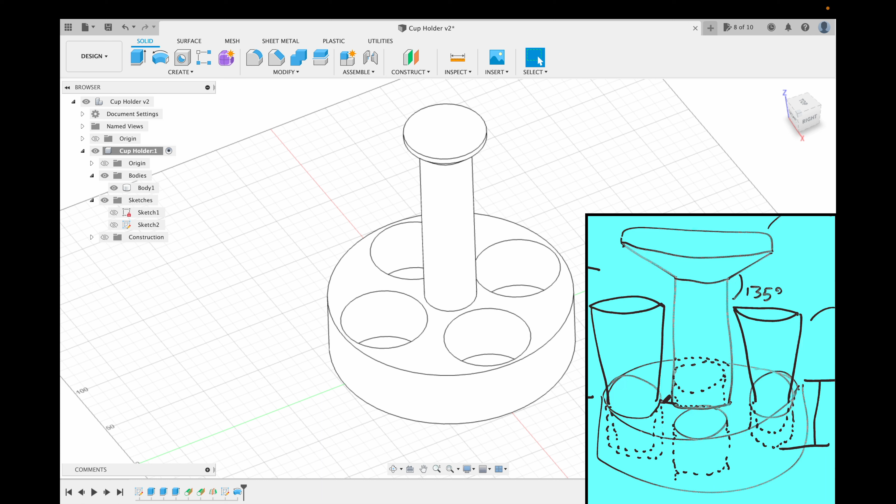So when I think about the stages of CAD, first I'm thinking about basic geometry, and that's what we just finished. You look at this, it kind of matches our picture, but we're really not done. So what I like to think about next is smoothing out the parts, making sure that everything is printable, everything looks like it's going to come out nicely in the print. I want to avoid sharp edges. Looking at this, I think I'm okay with... Am I okay with this?

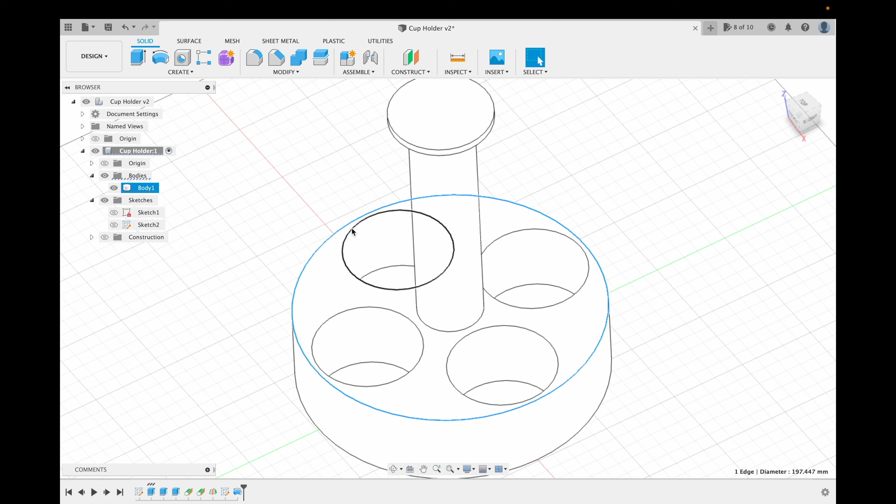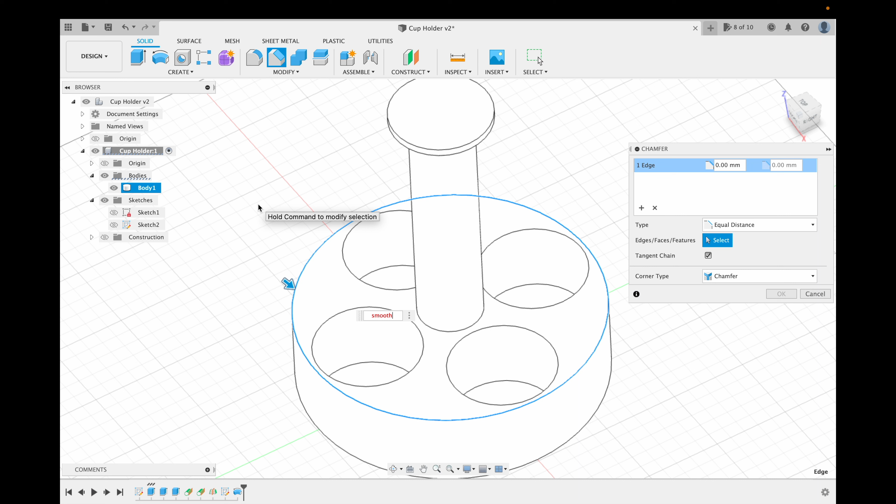I think that I might prefer, actually, for this outer edge right here, to be chamfered. Because this is 90 degrees. As we talked about before, 90-degree angles are kind of weak points, although there's no real stress on this part, so I'm not worried about that. But it does mean if I chamfer this now, let me just show, and I do that value smooth, let's just hit OK. I don't even have to hit OK. You can see from the preview. Let's zoom in.

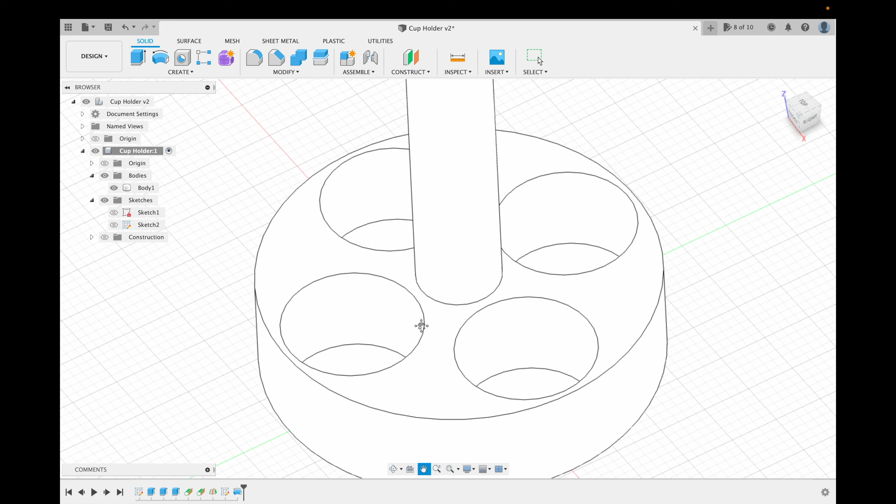I now have a very thin wall right here, and that's because I didn't prepare for the chamfer in the initial measurements. So let's hit cancel, and let's see if we can fix this without breaking everything. So I'm going to go back to our very first sketch. And all I'm going to do, I think, is I'm going to add 2 smooths to this outer circle. So instead of 2 times smooth, it'll be 4 times smooth. And that's that. If we look at this now, if I just draw a little test line from here to here, now we're at 5, which is 3 wall width plus 2 smooth.

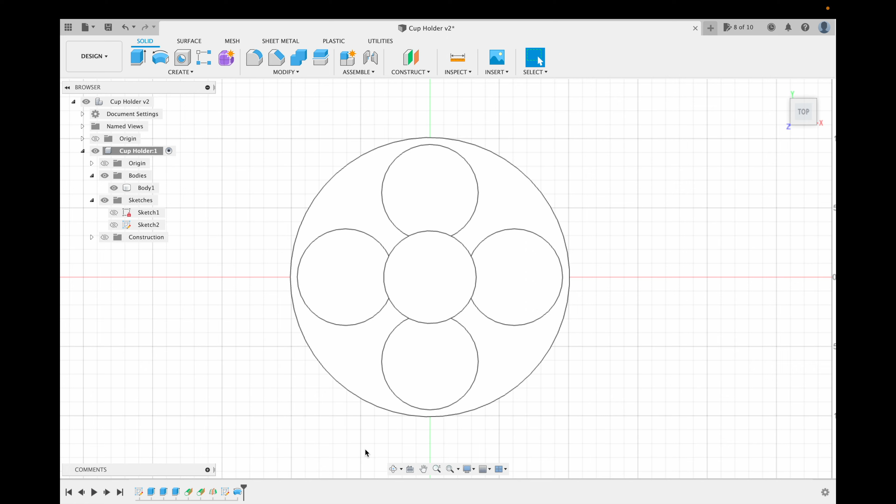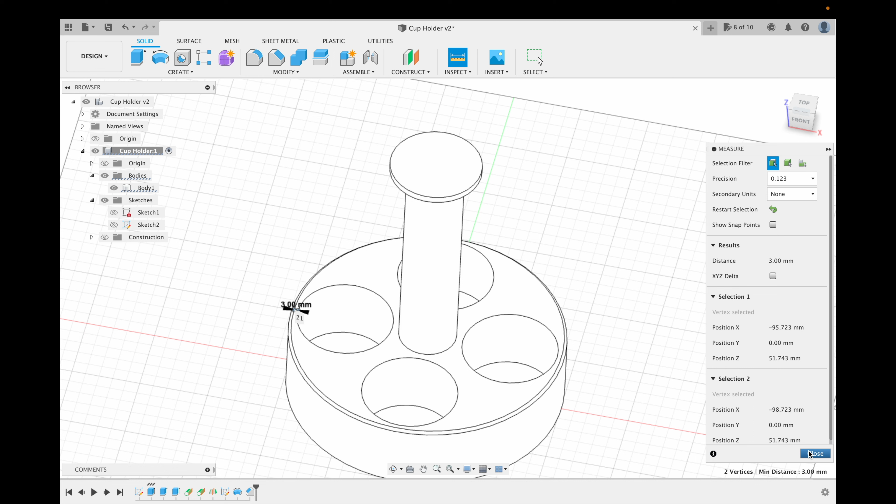So let's finish that sketch. And let's look at this. If we do measurement, maybe we can get it to show us, yeah, that is 5 millimeters exactly. So now, if I go and I do a chamfer out here, and I do smooth, I can now measure from this point to here, and we get our wall width again. So I still have my full wall width intact, and I have a little chamfer. And that's just so that if I'm trying to hold this with my hand, I'm not holding kind of this sharp 90-degree edge.

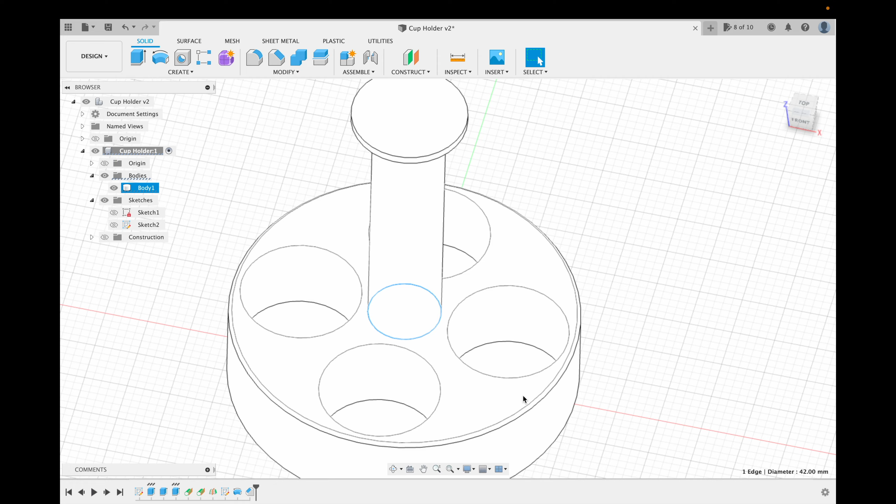The other thing we had talked about before is this right here is a weak point. That's true. We can either fillet it or we can chamfer it. In fact, it's the same situation with this edge. What was chamfer, but let's look at this as if it were a fillet. I can go back to shaded, and let me undo that and swap it out for a fillet. Okay. I think that'll work too. I don't think that there are going to be any issues printing that.

I do think that since I set the value of smooth to 2, we'd probably want maybe a relatively small layer height. So just thinking ahead to the print phase. But I can also increase this smoothing by changing the smooth value to 3. We'll just do a little bit of undo redo, and you can actually see how this changed everything. We've increased the separation because I'm going to be adding smoothing, and I want to preserve that wall width, which I'm clearly doing. And now I've added to the smoothness.

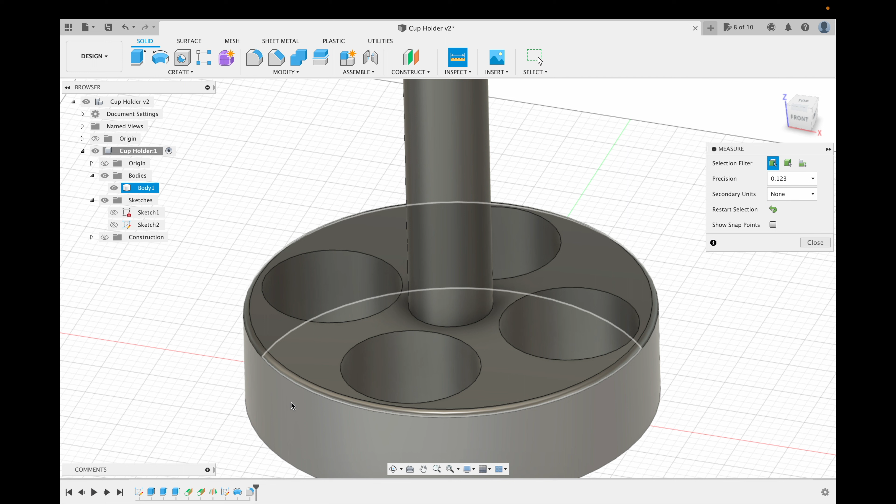But I do want to make sure that that outer diameter is still acceptable, and we're back to 205. That's really about the limit. I'm okay with that, though. Additional smoothness is an acceptable trade-off for that to me. Now, I could also look at smoothing these off. I think that actually is not a bad idea.

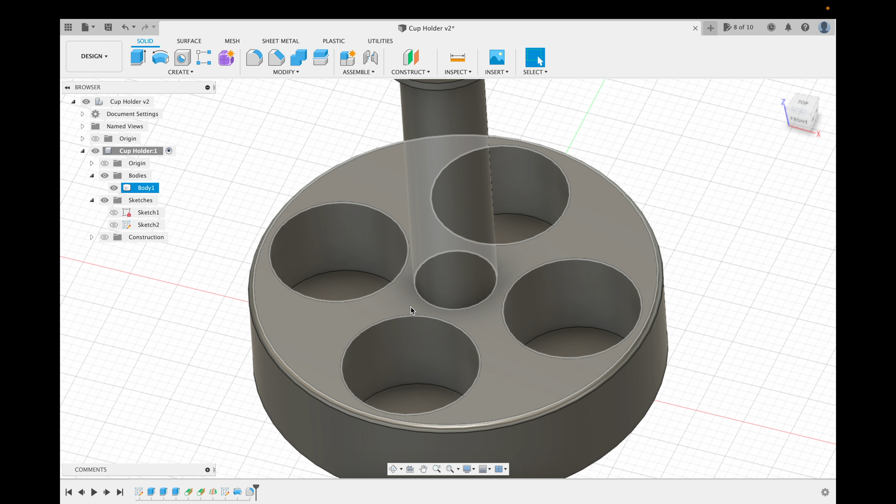Now, would I be able to fit everything if I also added a smoothing there? That would add, I would have to account for it here on the left and the right, and again here on the left and the right, so I'd actually be up to a little bit too much. I can already tell you. If hypothetically I were to do that, I would be at 8 times smooth. And now we're at 217 millimeters outer diameter. That's too much.

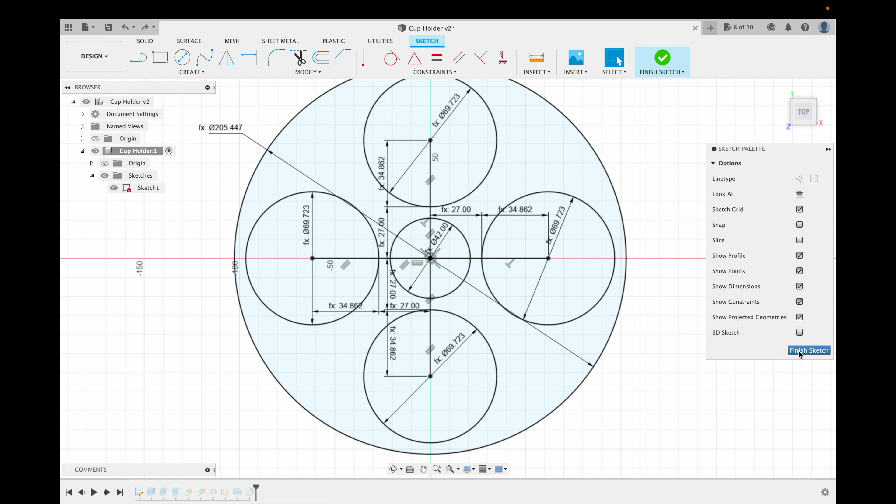So what we could do is we could bring smooth back down to 2. Or, honestly, we could change the diameter of the handle base. 42 millimeters, that's a little bit less than 2 inches. Does it need to be that wide? Could it be 1 inch? I feel like that might be too narrow. But maybe a little bit less wouldn't be the worst thing. If I bring this down to 38 millimeters, let's see what that looks like.

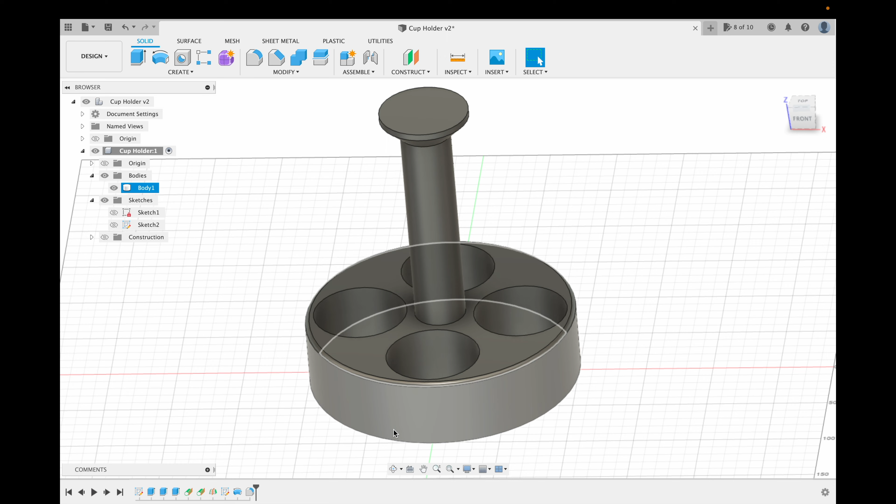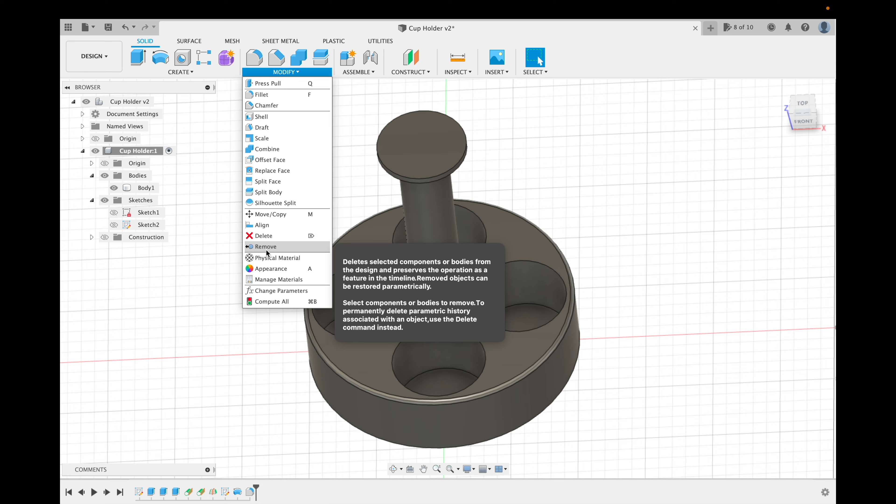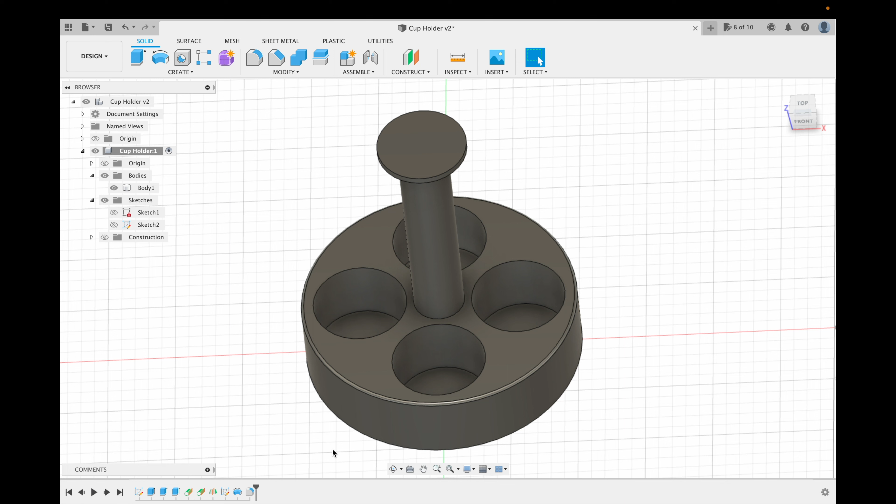Okay, we just narrowed things out a little bit more. You can also see the effect on the top of the handle. And if I look at my outer diameter now, 201, so I still don't have quite that much leeway, but if I reduce the value of smooth down to 2, and now I go back to my original sketch, and now if I do 8 times smooth, what do I get to? 205. We've kind of gotten back to where we started with. I do think that this 2 millimeter smoothing should be sufficient just to make sure that things aren't sharp.

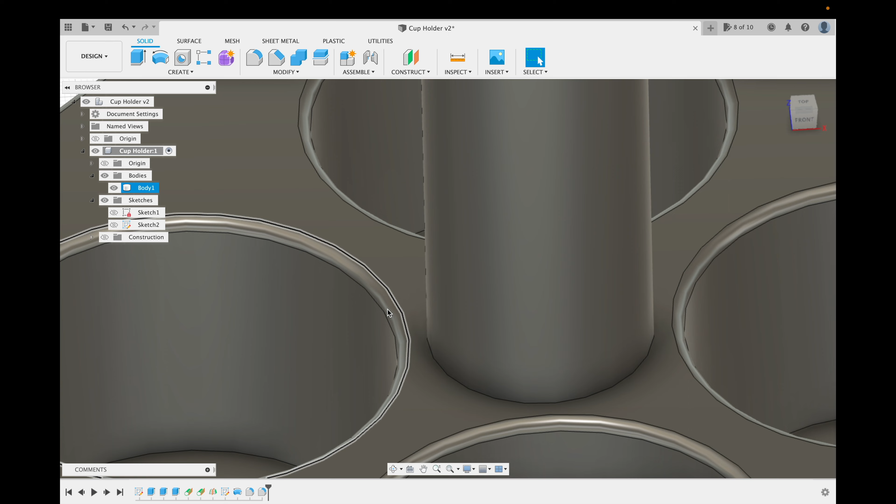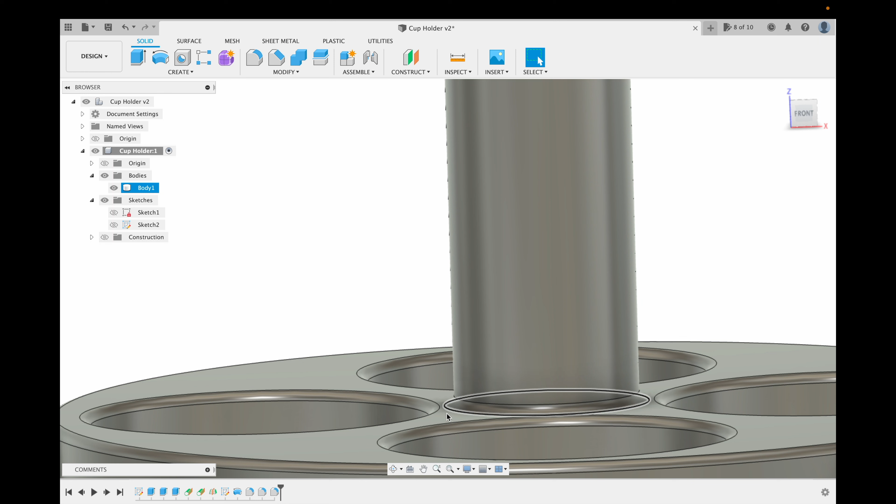Now that we've done that, we can add some fillets on the cup holders in the value of smooth. And I'm now wondering, did I miscompute? Because the distance from here to here is currently 3 millimeters. I think we're actually okay. So let me add a fillet here at the base, which is equal to smooth. Now, if you look at this, I'm not actually violating any minimum wall thickness concerns because this is kind of a downward smoothing action, whereas this is more of building up, or kind of building out. And we're adding that little bit of additional strength there. And actually, because of that, I think that it's totally fine.

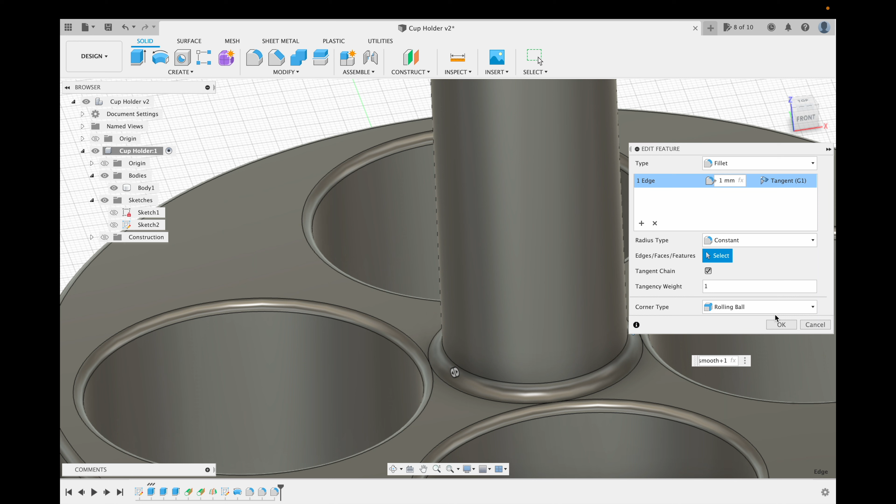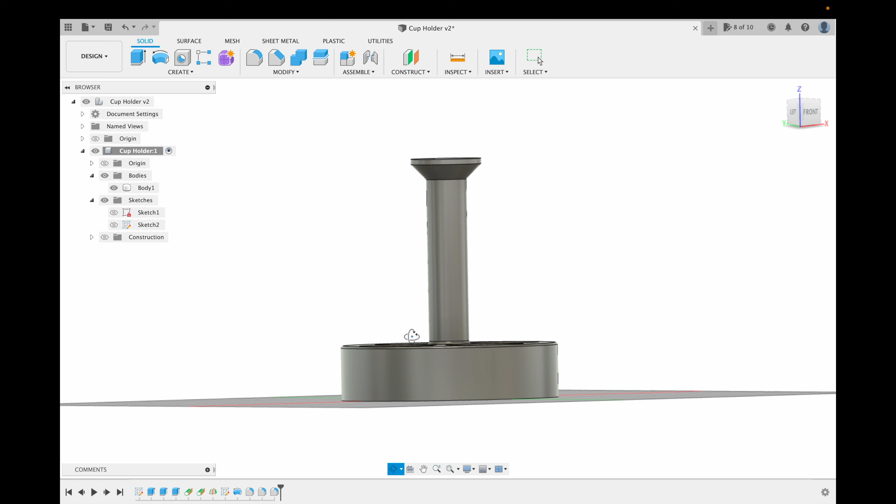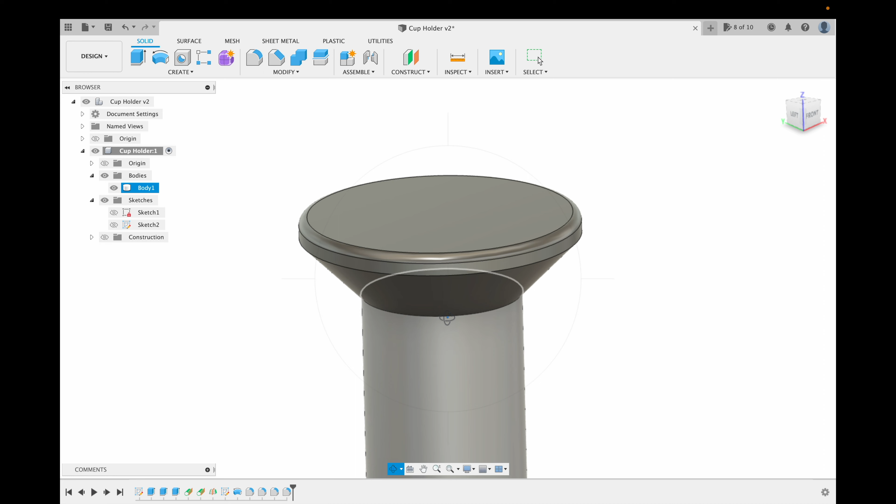Minimum distance is 1. I can actually increase this specific value. I'm going to kind of cheat here and add smooth plus 1. And I think this will print just fine. And we will see this verified in the slicing stage. And like I said before, I think that we're okay at the top. One thing that would be nice is if the handle at the top was smoothed out. Let's see what that looks like. That can be a fillet too. I use the value of smooth up there. How does that look? I think that looks better. And again, we're avoiding those 90-degree angles.

So, I actually just remembered, I forgot one very critical thing. Every time that I'm working with a functional print, I'm going to be inclined to add some tolerance to it. So if I want a part that, let's say, is 30 millimeters, I want to fit it into a holder. I'm not going to make the holder 30 millimeters. I'm going to add a little bit of leeway to that. So if I go to parameters, this doesn't need to be a lot. You can, in practice, really go as low as maybe 0.2 millimeters. That's a typical value for parts that fit into each other.

But for large parts that fit into holders like this, I like to go for a little bit more, like at least a millimeter, maybe two. And actually, if you think about it, in this case, it's not a huge deal because the worst case is the holder is too tight and the cup will still fit into the holder. It just won't touch the bottom. That'll add more stress to the corners of the holder, which is not what I designed for. So I intend to avoid that, but it's actually not fatal. So I'm going to add a parameter and I'm going to call it tolerance. And I'm going to start with just 1 millimeter.

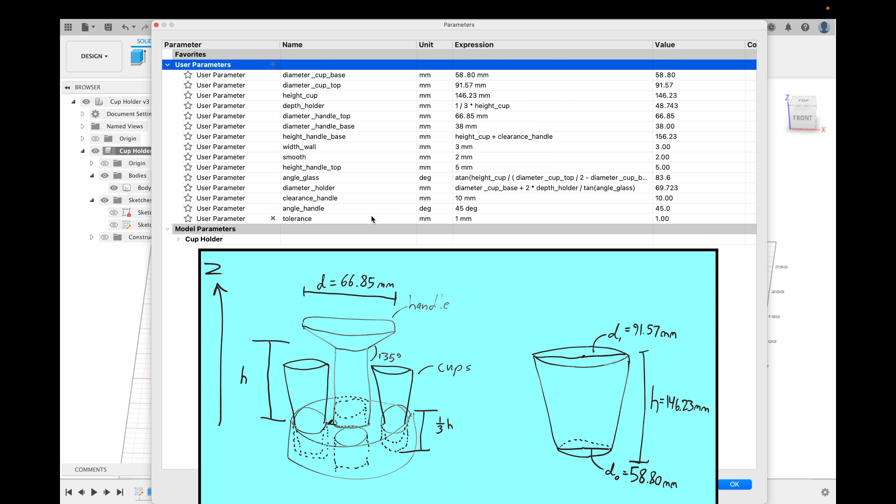And the way I'm going to add that is I'm imagining 1 extra millimeter on every side. So if you have a cylindrical holder, that means on the left I want 1 millimeter, on the right I want 1 millimeter, which means if I've got diameters all over the place, I need to add 2 to that diameter. And so I have this handy value over here, diameter of the holder. And it was computed, and I'm going to add 2 times tolerance. Okay.

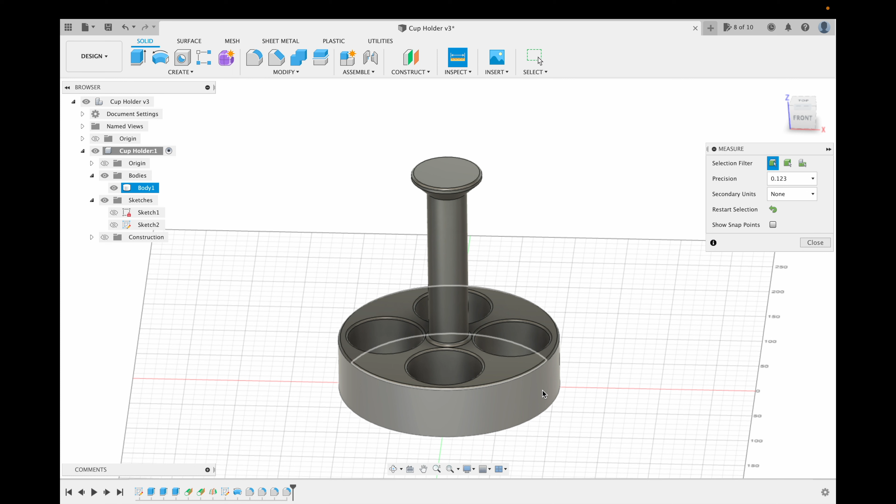Let's do a little bit of undo, redo, and you can see that increased the size of the part. Now I am worried about the overall size. Let's measure it. 209.447. That's not great. I really don't want it to be that close to the edge of the print bed. I'd rather have a little bit of breathing room.

So I'm going to actually bring down the diameter of the base again down to 36. We're just going to see how this goes. And that saved us and brought us down to 207. So I'm going to save it now.

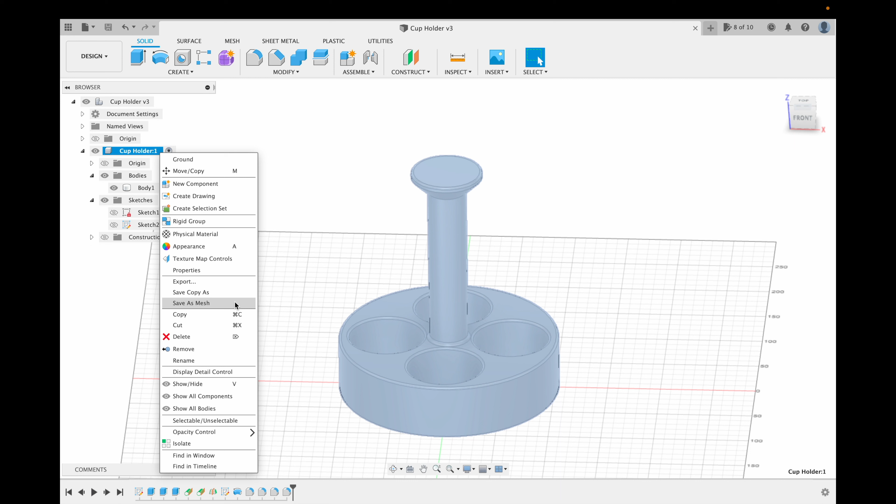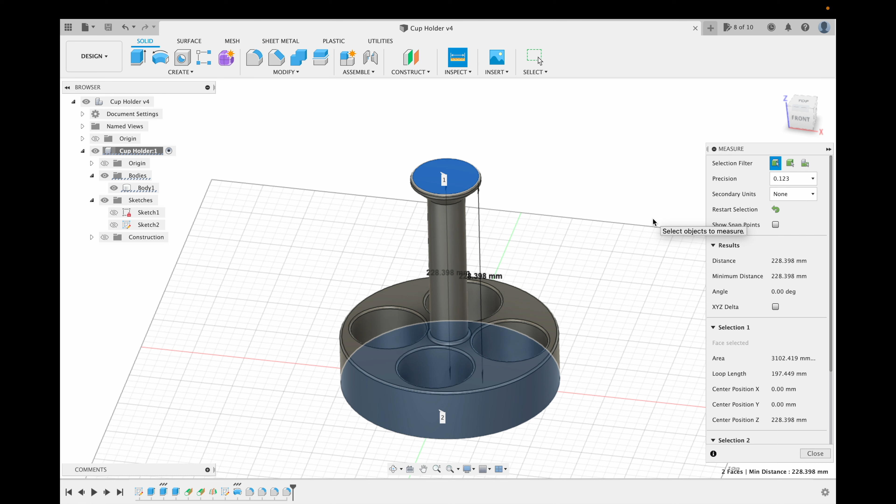And one other critical thing that I forgot. Let's measure the height of this part. Top to bottom. Okay, so that is 228 millimeters. That's too high. Because if you remember, and this will be interesting, our upper limit for the print is actually 210. So we need to bring this down by at least 18, actually at least 19 millimeters. And again, I don't want it to be that close to the upper limit.

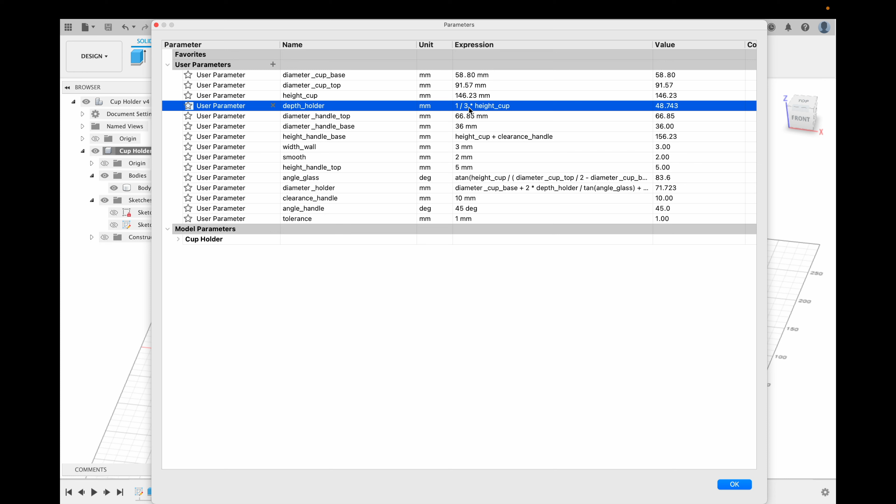The way that we change this is by changing the depth of the holder. I initially went for 1/3 of the height of the cup. And what is that? So 1/3 of the height of the cup is about 50, and I need to shave off 19. If I just quarter this, I'm gonna get about, what is a quarter of that? That's about 37.5. Not quite enough, but if I cut it in 5, so what have we gotten actually?

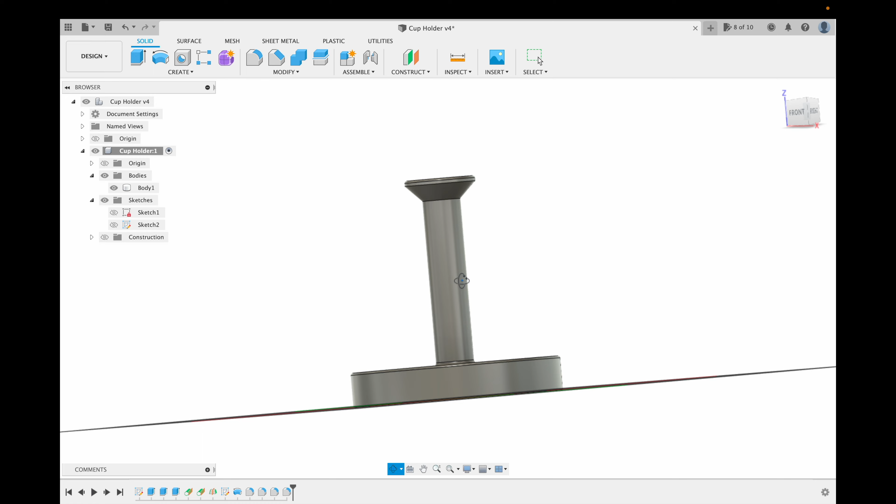Let's just measure it. Top to bottom, 208. Well, that is enough. That is enough. I'm a little bit less convinced that this is going to be high enough. So what I'm imagining now is let's revise. Instead of doing this, I'm not too comfortable with this. Instead of doing this approach, let's look at why I wanted some of the parameters that I initially did.

This height, I imagined this to be equal to h. And I wanted that because I imagined loading in the cups basically strictly from right to left, if you imagine that, like this. Well, that's not really how it has to go. The top of the handle turned out to be a lot shorter than I initially imagined. I think that the cups are going to fit just fine if they have to be wedged a little bit.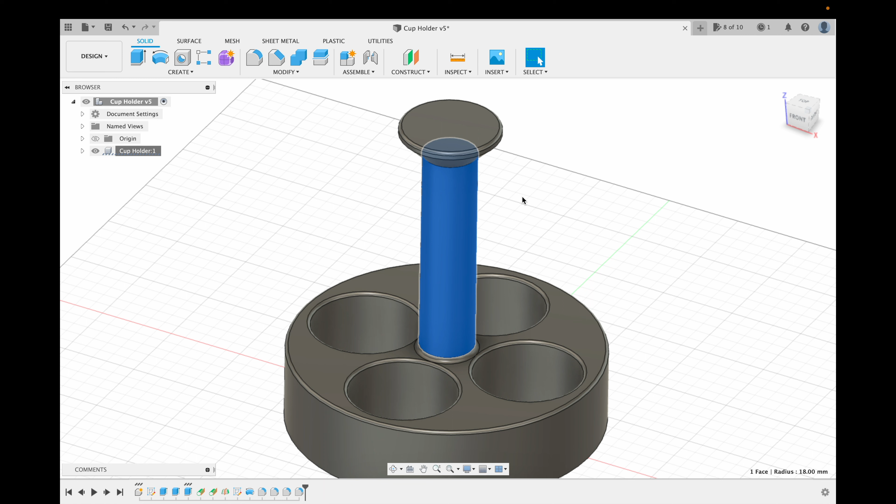In fact, I think that when I added that clearance, so here's the clearance. We're going to take this down from 10 to 0. Let's see what that does. A little bit of undo redo, and we can see how it brings it down. And that means that what's remaining of this handle is just H, height of the cup. So it should fit exactly into this cup holder.

So let's take a look at our dimensions again. So the outer diameter, 207, which is pretty high up there, kind of pushing it, is printable though. And how about the overall height? So from top to bottom, 218. So that's not printable. We have to bring it down further, at least 8 millimeters. So let's see what we can do.

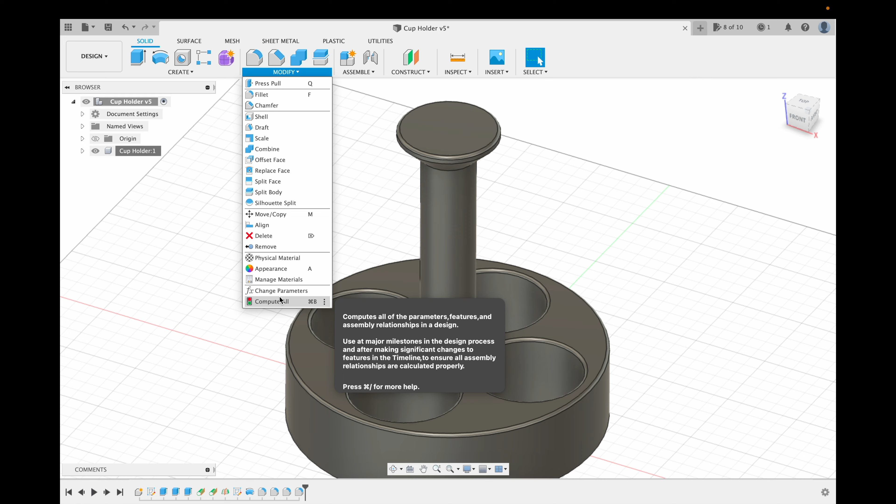Now let's think about the parameters that we have again. So one thing I'm thinking is, we have this depth of the holder. Now in the sketching and concept phase, I kind of intuited that a third of the height of the cup might be a good value to retain the cup. But that was just a guess. And I'm thinking that especially because we're designing this so precisely, we can actually dial this down a little bit.

And this should actually help us reduce both the height, because we're reducing the depth of the holders, and it's also going to help reduce the diameter, which might let us tweak some other things. So let's bring this down from 1/3 to 1/4 and see what it looks like. Let me do some undos so you can see. So it's brought down both the height and the diameter handily.

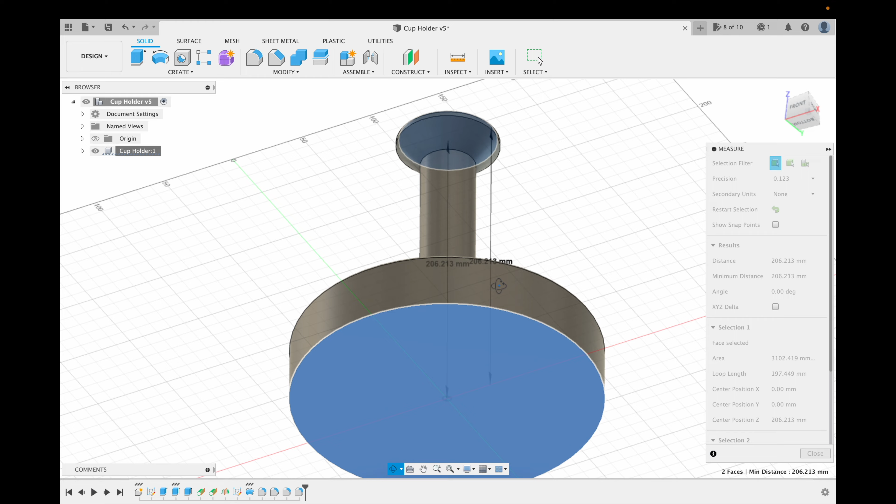Let's see exactly where. So the diameter is now 201.985. That's good. That's some more breathing room. And the overall height of the part, 206. That is printable. Perfect. So now, like I mentioned, we reduced the diameter by doing this. And I'm now thinking, how about that smooth parameter?

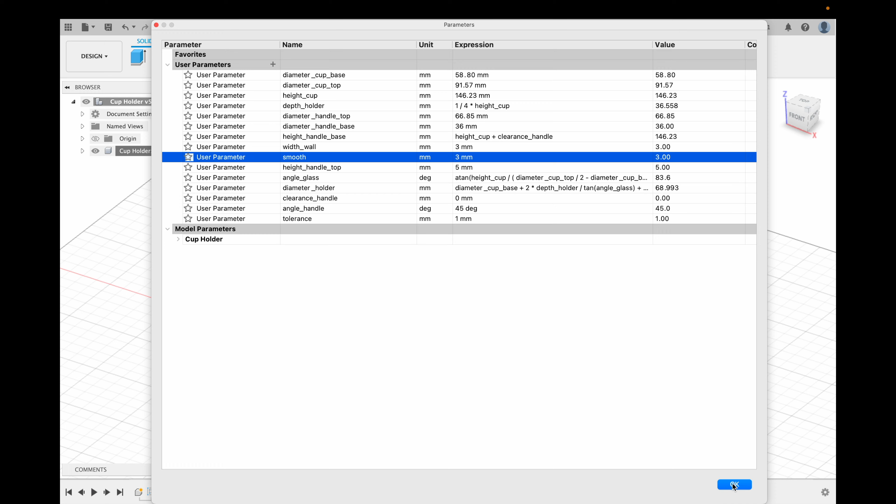We had reduced this from 3 to 2 earlier in an effort to save diameter because we were kind of at the limit. What happens if I increase this to 3 again? You can see that all those fillets, all that rounding off gets a little bit more intense. And it looks like we have maybe some funny business going on at the base of the handle. There are these new kind of sections appearing, and oh, I see.

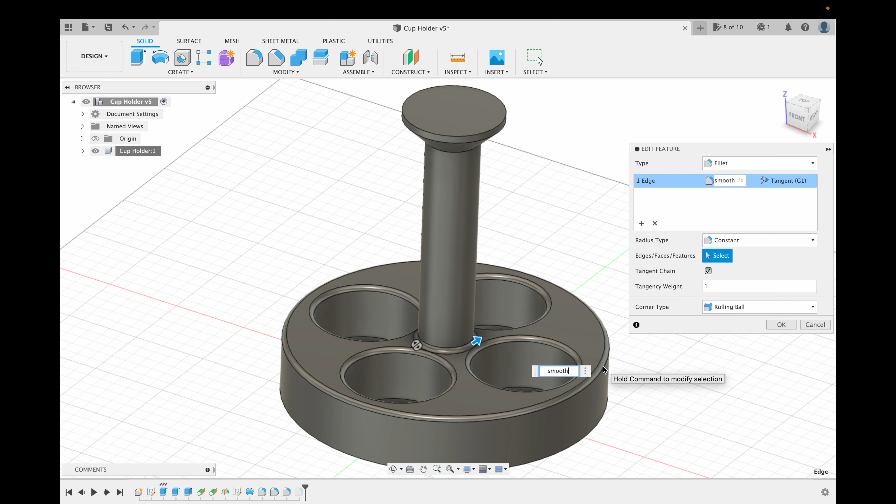So before, when we made that rounding off, we had added in a little hack. We had added a millimeter to that, but that was a mistake. We really didn't need to do that. And if we remove that, now these fillets are nice and flush with each other. And what is our overall diameter now? 209. That's higher than I expected.

So looking at this part, this actually looks... I want to double check a measurement here. So I want to verify our wall width, because this looks kind of large to me. So if you look at this, the distance from the edge of this fillet right here, this rounding off, to the edge of this one is 6. But here, we should only really have 3, actually. That should be wall width right there.

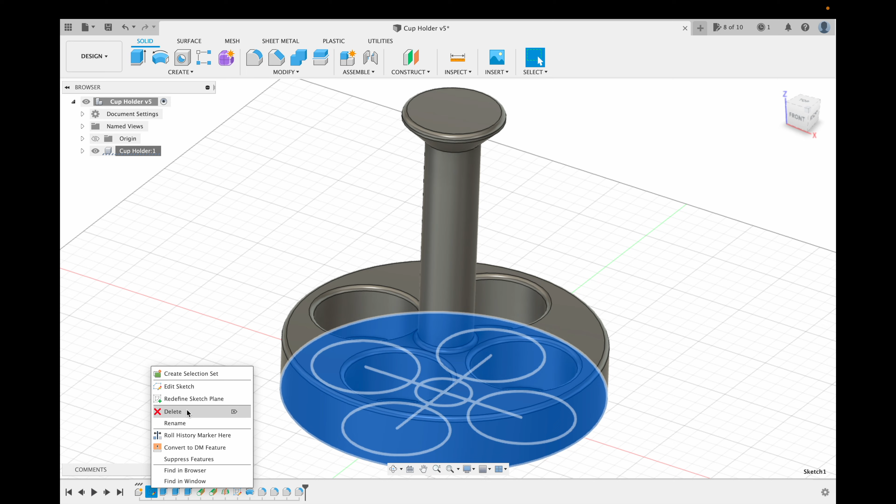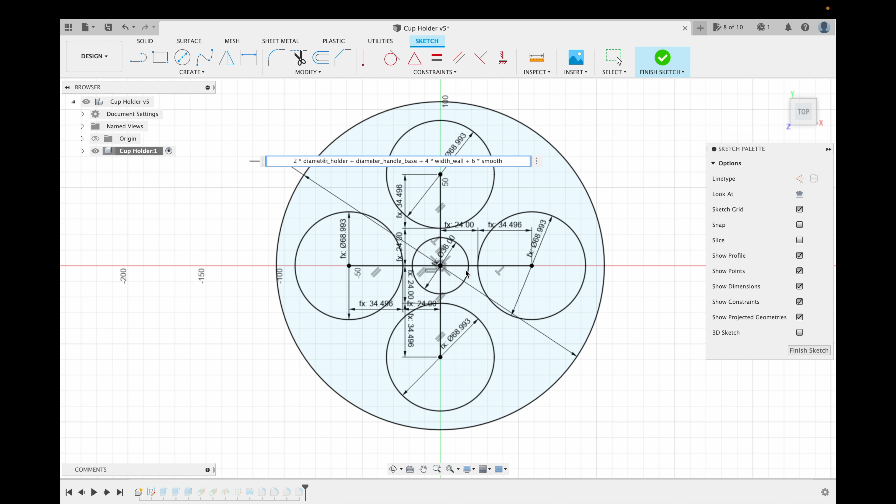So I think that what might have happened is in our sketch, earlier, if we look at the computation for the outer diameter, we had upped that from 4 smooth to 8 smooth. I think that this is actually 6 smooth, and the reason is we need that extra wall width on the left. We need it on the right. But actually, I don't think we need it in the center because we're happy for those 2 fillets to be flush with each other.

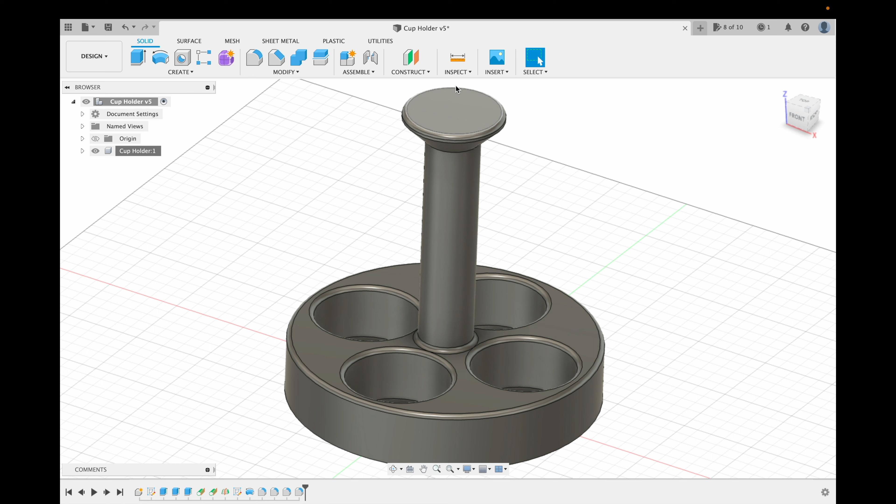So let's take a look now. Minimum distance 3 millimeters. That looks perfect to me. And now what's the result as far as the outer diameter? 203.985. That looks good to me, and let's just double check the overall height. 206.213. Also looks great to me. That's printable. Our fillets are nice. They are flush with each other here.

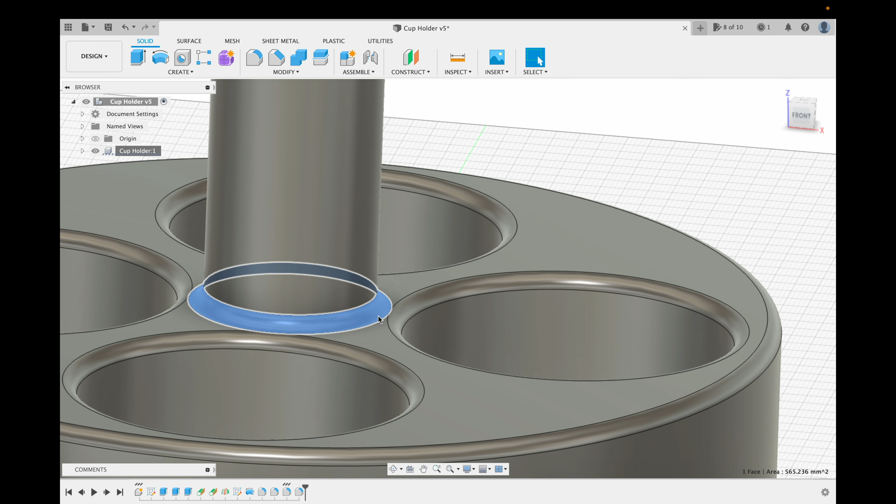And just a note, the reason why I'm okay with these fillets being flush with each other, if you look at them closer, again, this fillet is kind of building out, whereas this one is kind of building in. If you think about the wall widths involved, by having these right next to each other, there's no minimum wall width violation. So we don't introduce any thin walls here. So we should be okay.

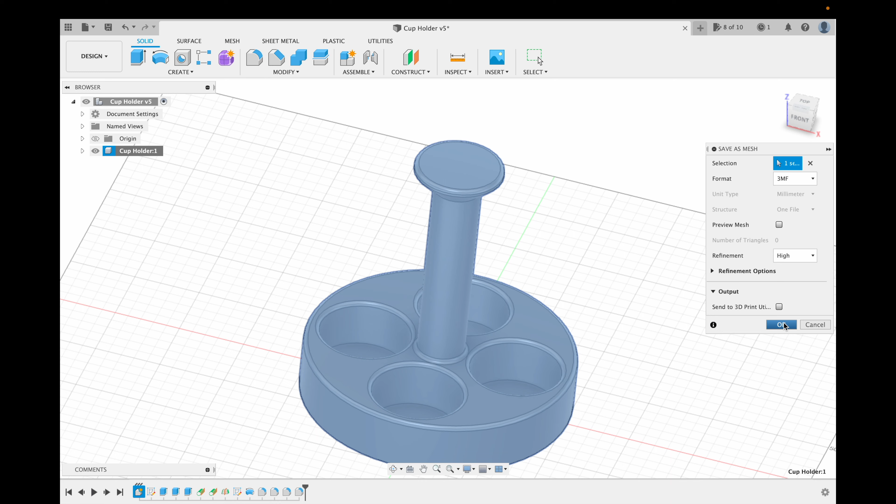Okay. So at this point, I think that we can export this and move on to the slicing phase. So let's right click our component cup holder, save as mesh. I prefer the 3MF format, which includes some extra metadata like the units. And I think it's superior to STL. And then high refinement, and then I'll save this and we can move on to slicing where we prepare the mesh to be printed. So now we're done with all the refinement and iteration.

And as you saw, we learned a lot in this process. We made a lot of improvements. We corrected a lot of faulty assumptions or miscalculations and came up with a part that we should be a lot more confident is going to be a good print, a good mechanical part. So the next step is to actually do the slicing process, which is where we convert the 3D mesh that we produced here into a set of instructions for the 3D printer to use to produce our project and turn our imagination into reality. So look out for that in the next video.